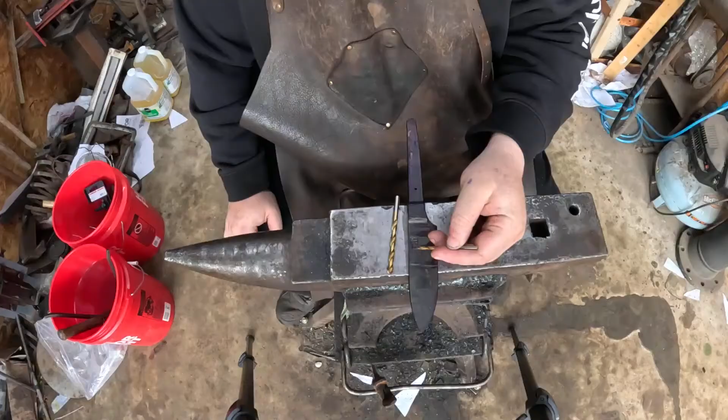Now, we're going to be doing a few things today, but for the most part, we're going to be lining out a full profile of this bad boy. Edge geometry, blade geometry, handle geometry, every geometry known to man, because not only do we have to have the geometry of our blade here and the edge geometry, but we also have to determine the handle geometry, right?

You can do a couple things with these. You can make them thin and tall, like a fixed blade. You could round them off and make them feel more like the hidden tang that they are, or have more of that kitchen knife look. If we contoured and beveled all the corners on here and made it match up cylindrically back towards the pommel, that's very kitchen knife-esque.

I'm kind of leaning towards, you know, we don't have a super tall bolster area here, which is fine. We could go relatively thin up here, but we're gonna find our center line first. We kind of have a center line in here, but we're gonna find a good grind center line.

And how I do that is on an unground blade. Couldn't find the other ones, I'm gonna go look again. Okay, yeah, because it wasn't on your desk, which is weird. On an unground blade...

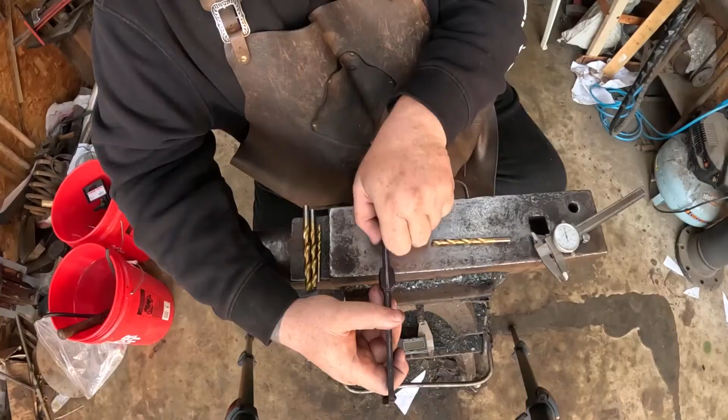You want a distal taper from the thickest point. Your blade should taper from the thickest point, which is our bolster here. You should distally taper towards the tang and distally taper towards the tip.

Now, if this was a full tang - this is just marketing, aesthetic stuff. For a full tang, distally tapered tangs have a much more aesthetically pleasing look to them. You're always distally tapering your blade, but distally tapered tangs look better.

Thick to thin, thick to thin, thick to thin, you know. So when we get over to the grinder, the last thing we're going to work on is the bolster area. First thing we're going to work on, blade. Secondary thing, tang - we're going to get it down.

Do we need 5 inches of tang out here? Absolutely not. We only need about 3.5 inches - we don't even need that much. We're only doing like a 4.5, not even a 4.5 inch handle, because we got to take into account that bolster area is part of the handle.

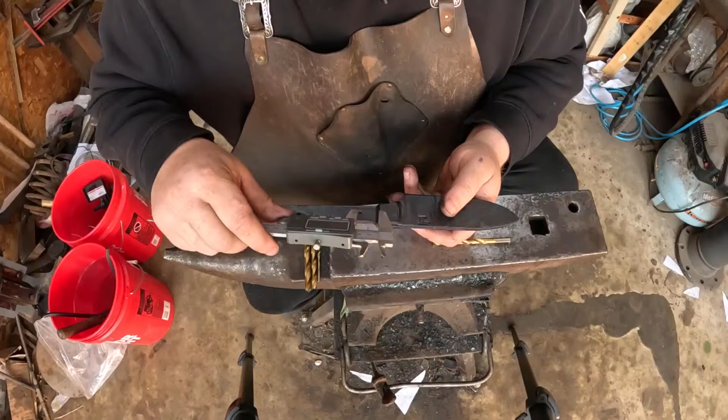We are at 0.8. Now that's where we start to swoop down into our tang and our blade. 0.860, yeah, 0.860 on either side. Now that's of an inch. We're using freedom units here in this shop. So, 0.860 of an inch for our length of our bolster.

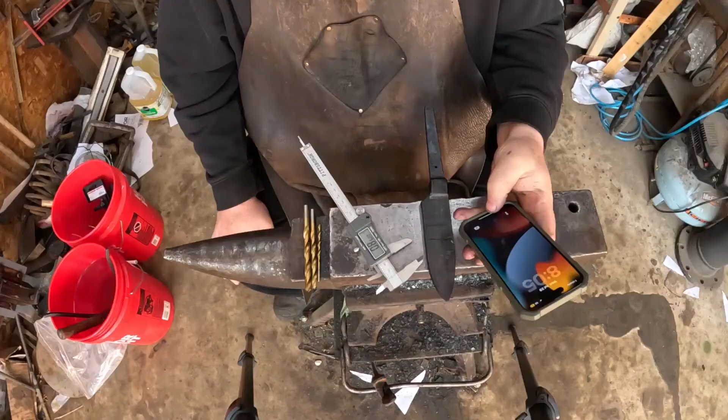Now, if you want to figure that out, 0.75 is 3/4 of an inch. So 0.80 is somewhere along the lines of, let's see here. I think it's, no, okay. Just under 7/8. Just under. 7/8 is 0.875, so it's right, it's a hair over 3/4, more than a hair, and just a hair under 7/8.

So right there, would that be like 11/16? No, 11/16 is right up close to... no, 11/16 is less than. I'm an idiot, 11/16 is less than 3/4. I'm an idiot, that's what happens when you have to voice your math instead of just doing the math and getting it done in your head and then going and grinding it.

Like, I'm doing more here for you guys than I ever do for myself. I will literally not ever use these things, right? And I don't draw center lines. I literally just go in there and grind, and I just freehand it all.

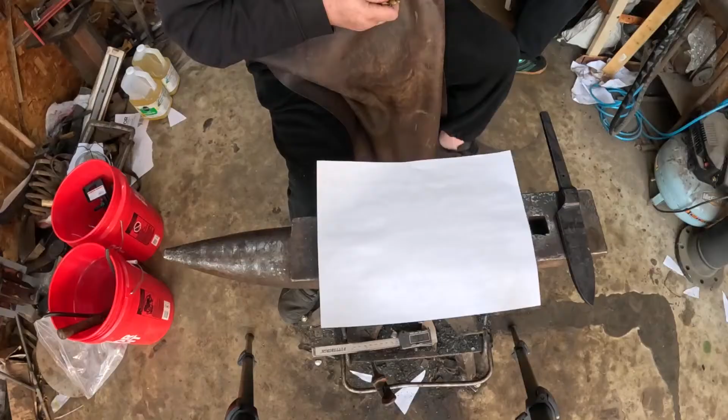Give me a paper and a pen, a pencil. Paper and a pencil, or a paper and something. We're highly organized here at Rust Hammer Forge. Yes, always and forever, just for you guys, it's all for you guys. We're so organized that we don't know where the shit is, our pens and pencils are, and it's all good. Here, we got a pencil. We got a marker. All right, marker, that'll work. For as many pens as I have for work, I can't believe we don't have any out here.

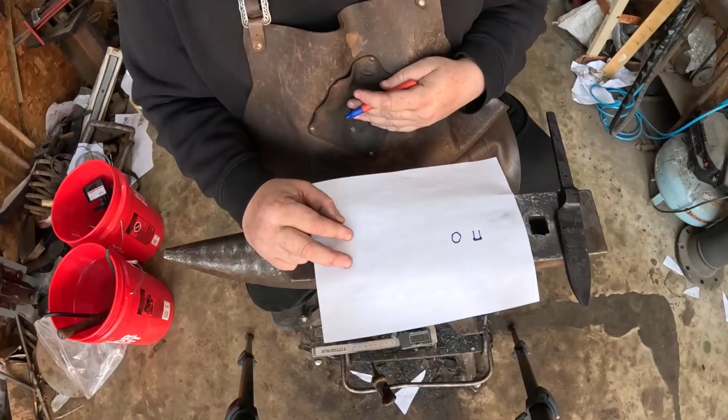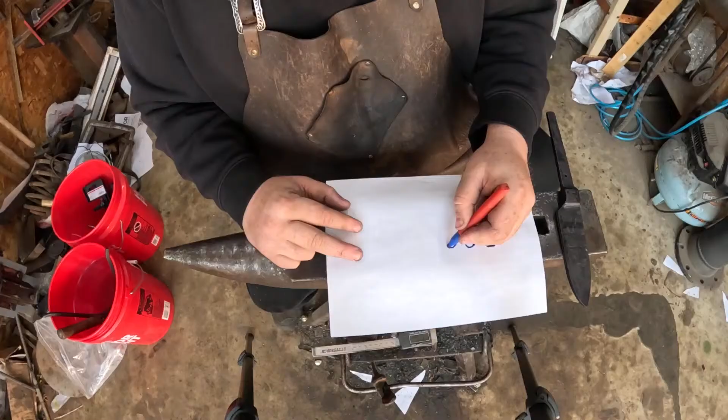Okay, so we can either go, as we're looking down the blade, we can either have it be square, where it's slightly rounded across the top, slightly rounded. We could go round right here, where it's not completely round, it's slightly faceted. We could go completely faceted, like a stop sign in there, and then that carries back into the blade or into the tang.

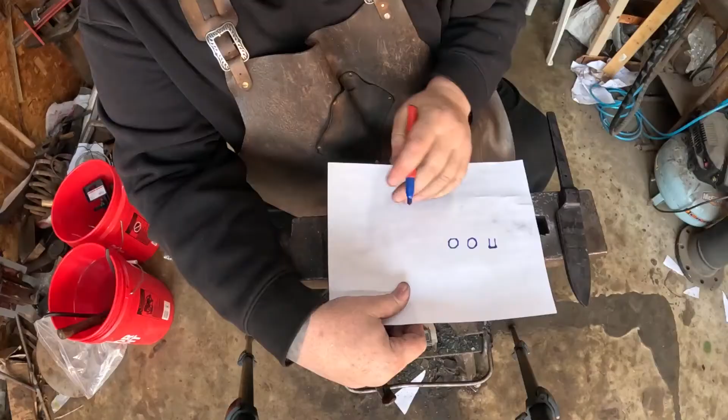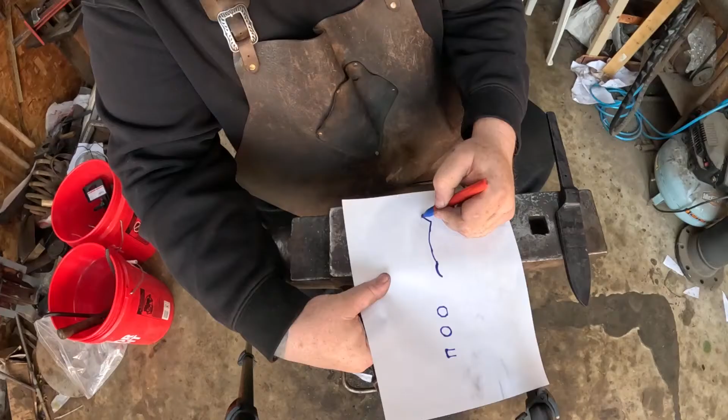I'm kind of leaning towards something simple of a design, to where we come, there's your finger catch, right? Soft transition, handle back here, it kicks back and comes back across, like that, something like that.

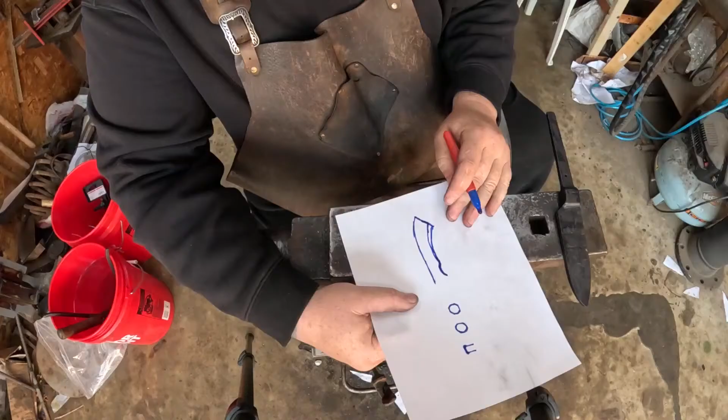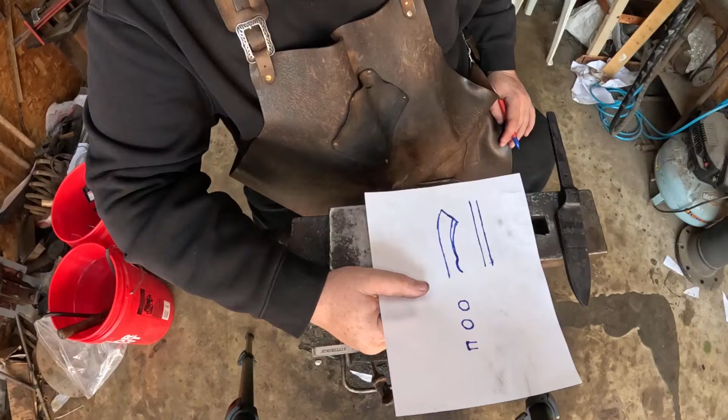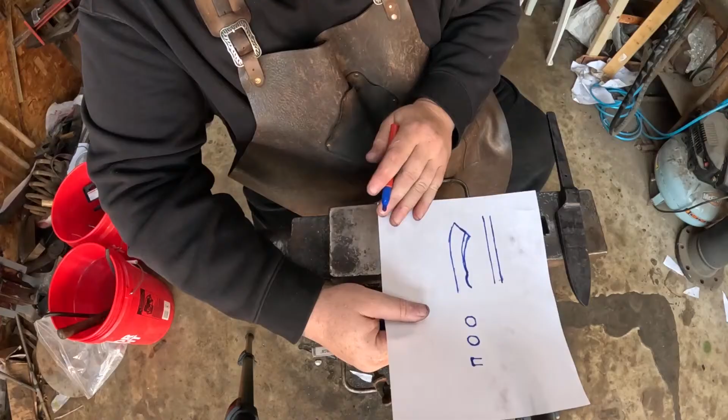Obviously the proportions aren't great because we need a bigger pommel area out here to really hold this in your hand. Now this could either be super, like, come here and it be just the same thickness all the way through, and that'd be good. That wouldn't be too bad, you know, be easy to use, it would still feel good in the hand. It'd feel like basically a large buck knife handle when it was open. But most likely what we're gonna do is we're gonna start here and flare out.

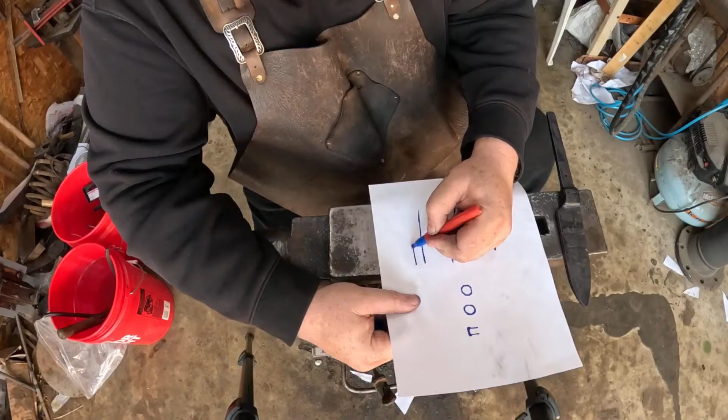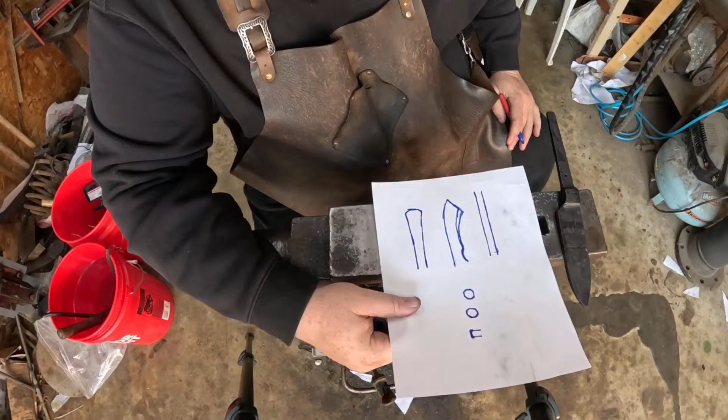We're gonna flare this out at the end, coming around with something that looks like that. So with a big knife like this, I don't necessarily want to make this super round because then it'll want to turn in the hand a little bit.

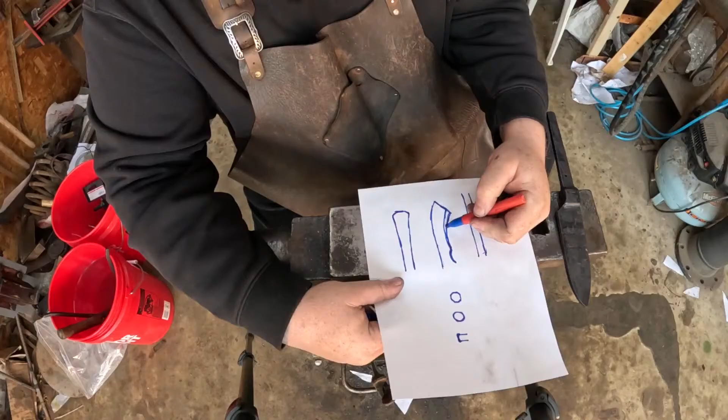So we have to have our flats in here. We can start to kind of round it off back in here, transitioning from this flat area to a slightly rounded area more in the back, in the pommel area. When you start rounding all this out, and then once it starts coming back into this plane right here, we can start running it a little flatter, obviously still keeping the corners chamfered pretty well.

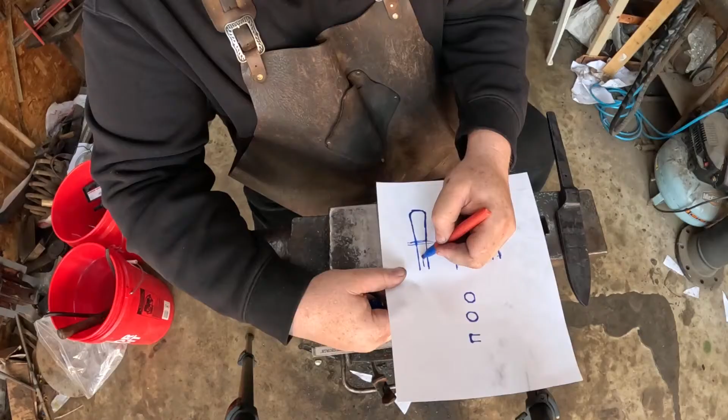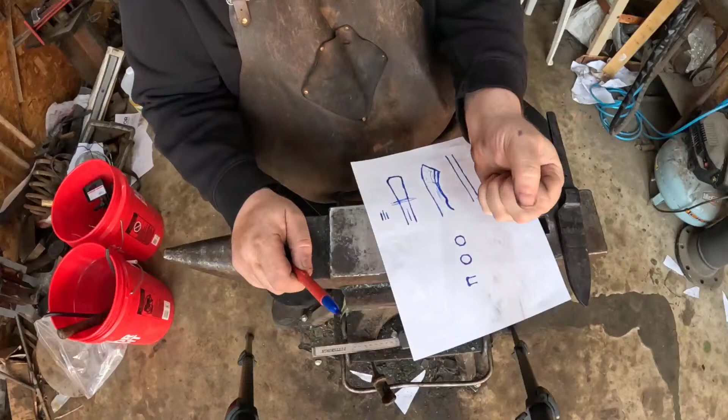And then it also gets a taper. So the top is pretty thick, this is our center line. The bottom right here is gonna be tapered a little bit, because when you close your hand, a tapered bottom piece where your fingers wrap around is way more comfortable. Even no matter how thick this is up here on the spine side, if you taper your handle...

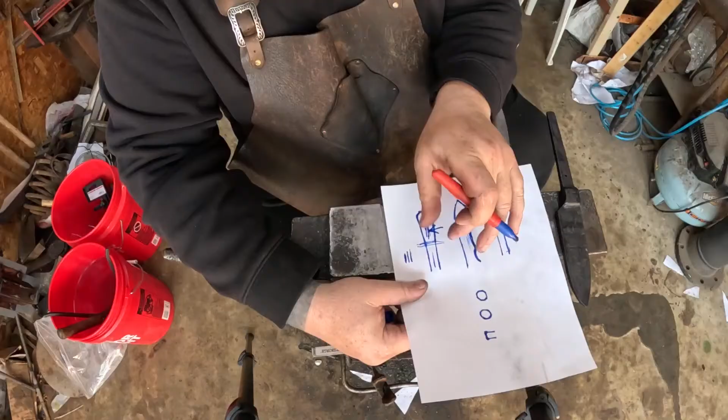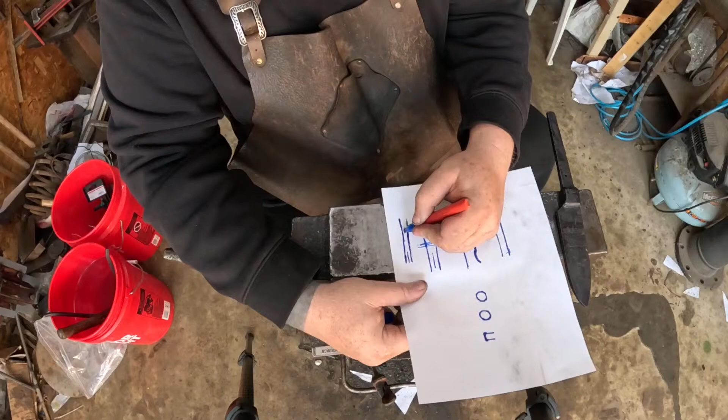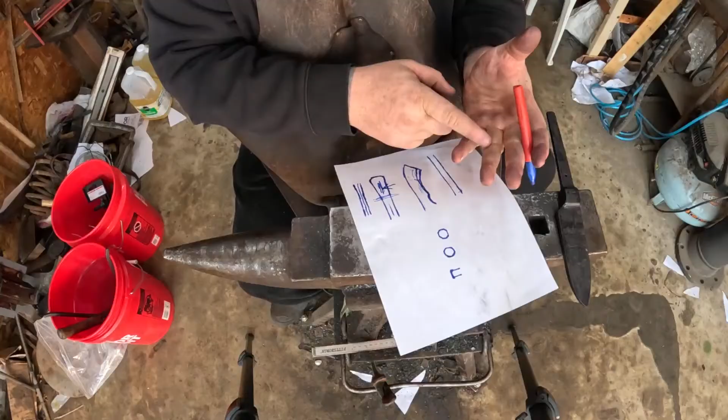...towards the edge side, and you kind of just slightly flare it out to match the flare on the top side, and kind of make it egg shaped, it fits in the hands. It fits right in the creases of your fingers, and you can really index it. That's all about a good knife, is being able to index that edge.

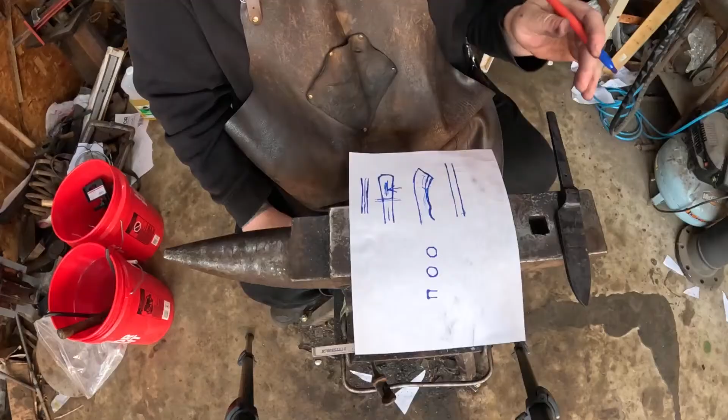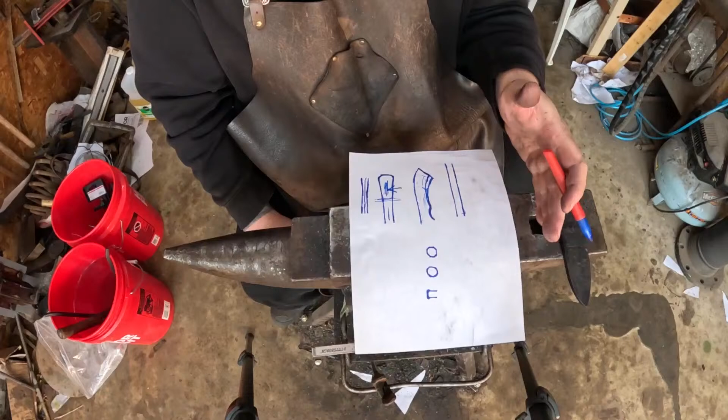So making sure the handle center line lines up with the edge of your blade allows you to index that blade, to know where that edge is at all times.

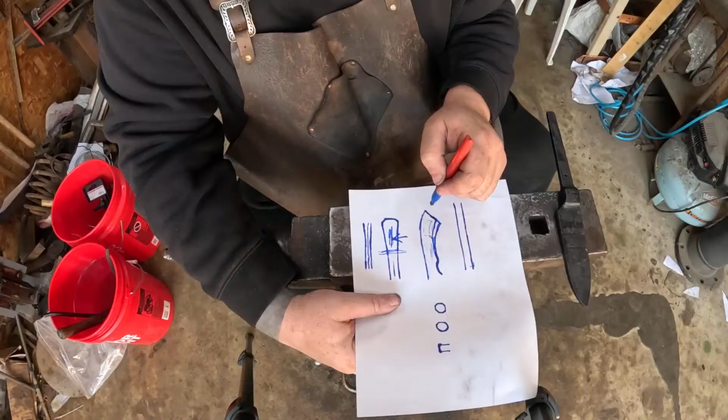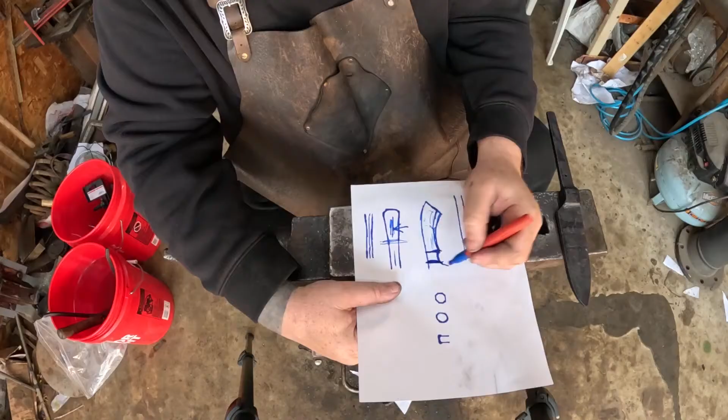So we're getting way ahead of ourselves here, but we have to think about this. Now our bolster is here, so that's where the shoulders are. The grippy part, that's our bolster. Our blade is here.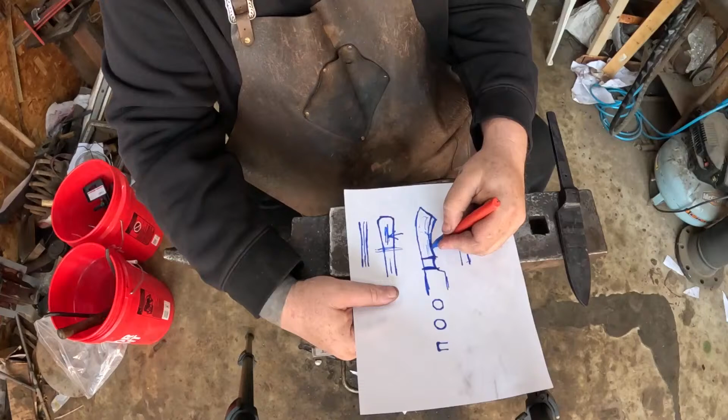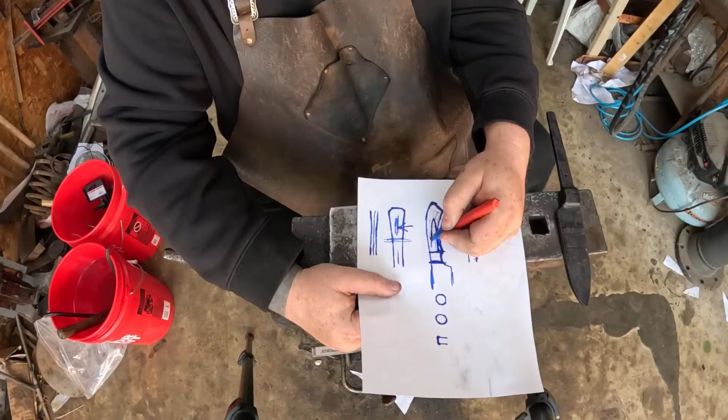Now that I drew that, extended that blade out, this actually looks really good. I'm really liking the way that handle looks. Finger catch, bam, finger catch, bam. Tang is gonna run somewhere around in here. Pin right around in there, give or take.

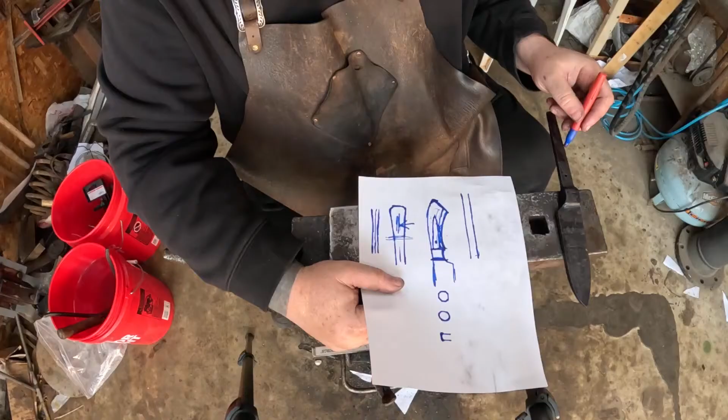So that's what we're looking at right there. The tang has to come down quite a bit. The tang's probably only going to be about half of this - we're probably going to cut half of this tang off. So when we're looking at our knife here, we're probably going to come in here right about in here, cut that off, and we'll do that right away.

And then we find our center line here. Best way that I do it is I eyeball it. Come back in here, we'll eyeball it. So that's the center line of the blade, but we have to go with the tang, so we're going to come back up in here.

And then I'm going to come in here and we're going to mark our angle that we want to cut that down to.

And I don't know if you guys can even see that on camera. Yeah, oh yeah, you guys can. We can see everything, you can see it a lot better. Yeah.

And we may make that tang a little bit longer. Now that I look at it, just a little bit longer. Come back in here.

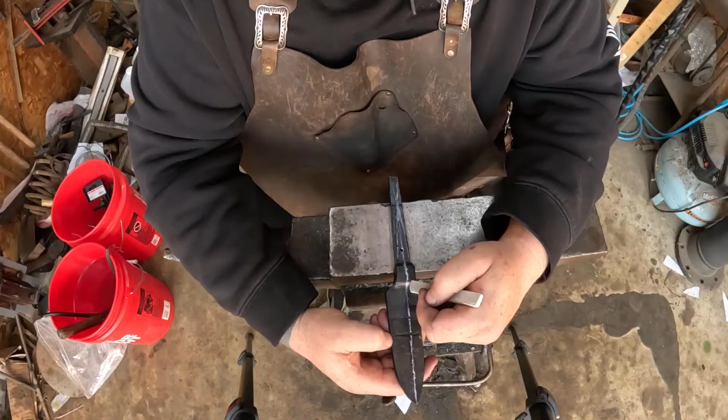All right, now we're almost to the point where we're just going to go start grinding. What we need to do - I don't want to cut this down yet until we get this on the grinder, because this is a really nice handle to grind with. If I cut it down, I'm losing a lot of my ability to control this piece. You'll understand it when we get over here and have it set up on the jig.

We're gonna go start grinding this at probably a 5 degree angle to start out with, and we'll see where that leaves us, and how thick we are. We want this to be right around - let's see here - pretty thick.

So if we go to our handy dandy calculator here, having our spine be at point... let me get all this garbage off of this thing. Clean our calipers. Want our spine to be 0.187, 0.1875 at its thickest.

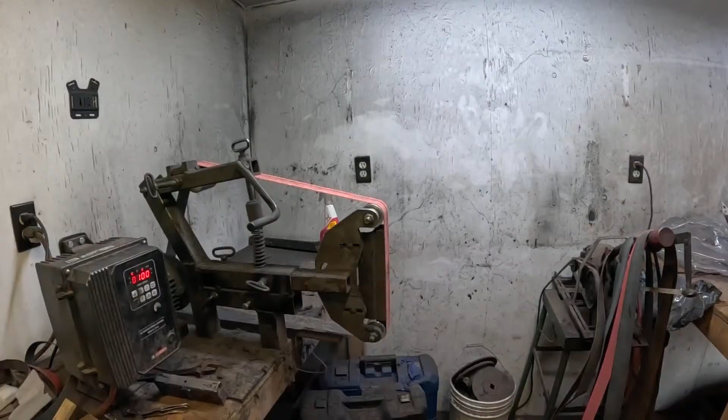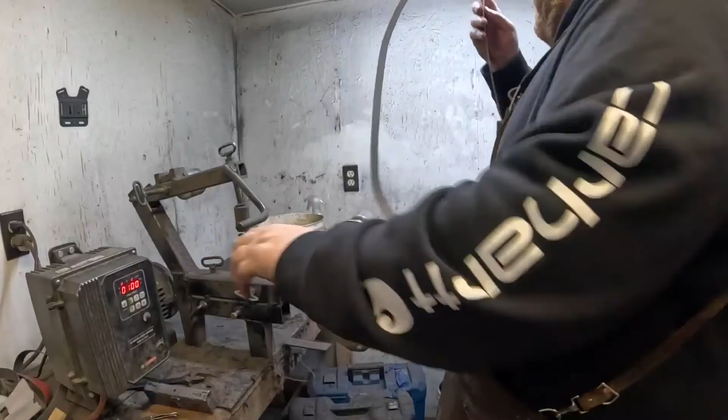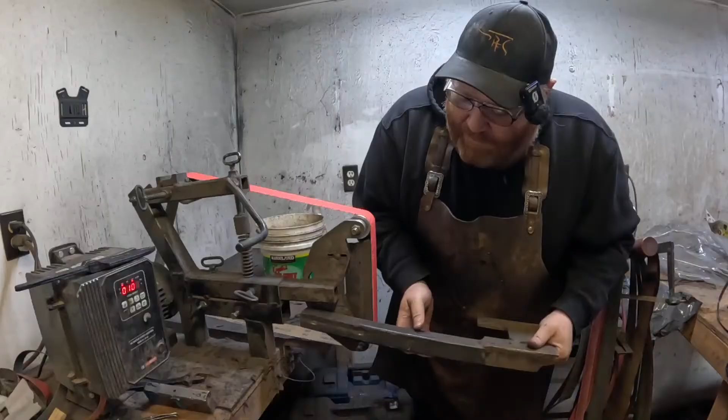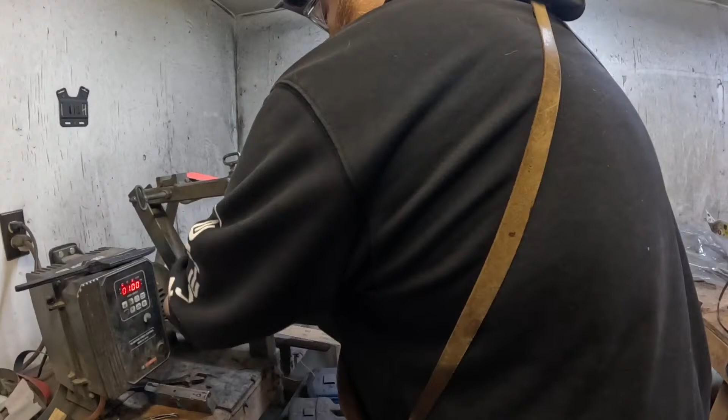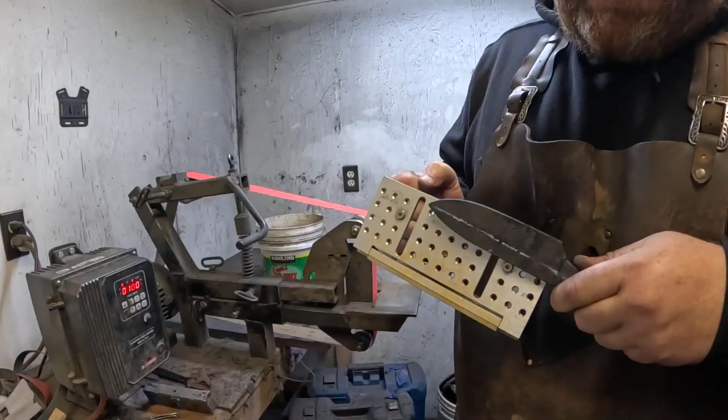Now we're using this nice Chinesium jig, but I can't have—like, I have these bolts to rest on. That's about it, right? So it's still a balancing act. We're gonna put one more of these in here. We're gonna move that one over, and we'll just put another one in there, right there, which we don't necessarily have. Well, we do, but...

And we are set at 5 degrees, 5-degree bevel right now. We just get a bam to there, and we turn around. We're there. Do the best job we can. That's all you can do.

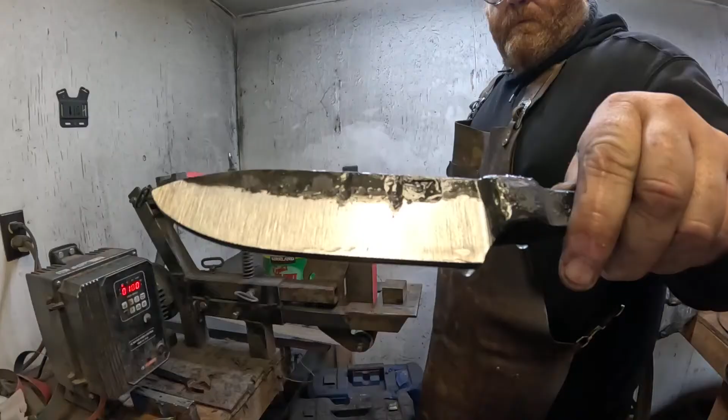See that pattern a little bit when you glint it. Looking pretty good. Woo! Bless you. Woo! All right.

Bit of that center portion here.

We're going to flip our angle here a little bit, and a little more square. A little more blade in there.

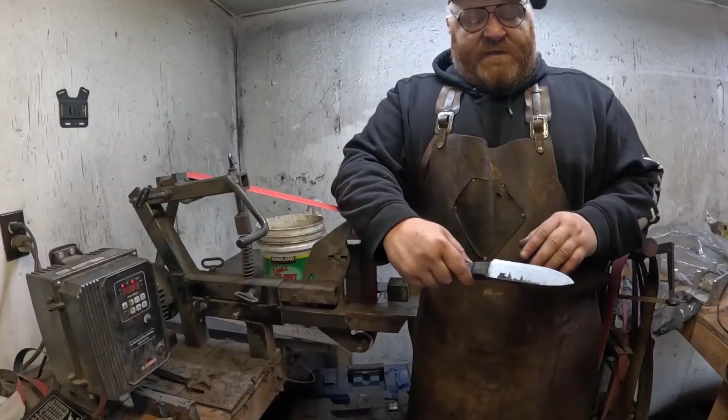Now we're almost there. We'll get this one side down and we'll check it, just for shits and giggles. But we can't do anything with it when it comes to running it through an annealing process and another austenization process, so heating it up for quench and letting it soak. And we can't quench it until both sides of this blade are done. We don't have to do anything with the rest of it—if we know it's soft, it's soft. The tang can be soft, it doesn't really matter, but the blade has to be hard. If it's not where we want it to be, we get the blade equaled out relatively, but it's still thick enough that it's not going to snake on us when we go into our quench. Make sense? Good.

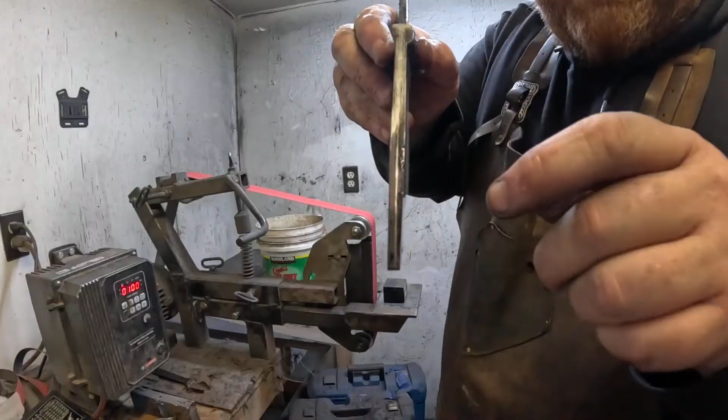You can see we got a nice taper going on that side. Looking really good.

What we need to do real quick is move our tool rest in. We're getting to that point where the blade could fall down in the gap. We don't want that to happen, because then you'd have to take extra time to screw around with making sure everything's straightened back out—it gets in there and just grinds away, and you may end up ruining the blade. So make sure your tool rest is set for the thickness you're currently at.

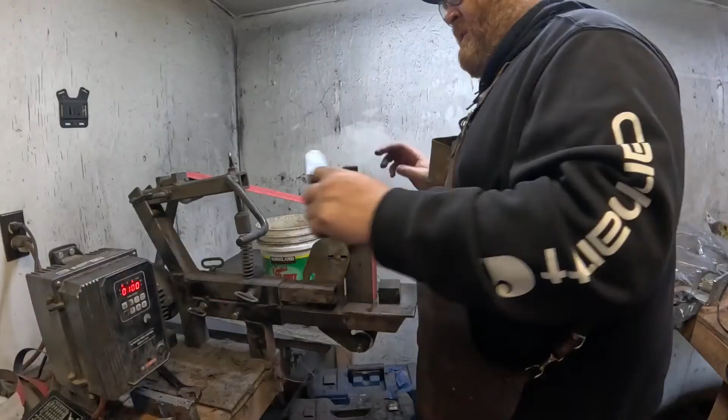We're going to leave that side like that, because we're still going to be going up here like this. So we're going to have a grind where we're coming in and working the transitions off the blade into that bolster, and those will come out and our maker's mark will get cleaned up. So I'm going to flip to the other side. We're going to see about putting you guys on this side of the house.

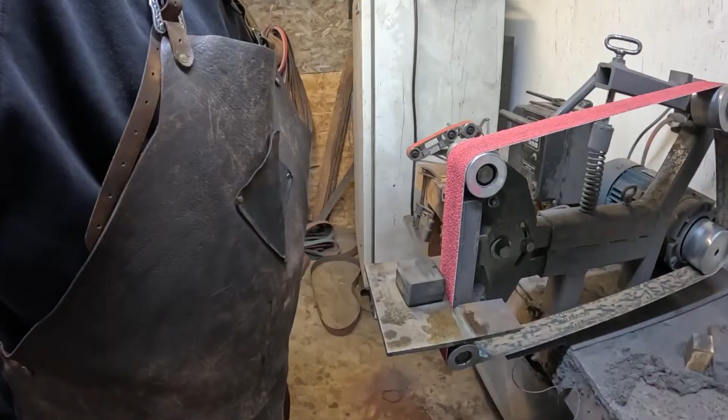Maybe, let's see what we can do. Oh yeah, oh yeah, oh yeah. We're good, we're good. But now it's facing towards me. Let's fix that—you guys get a little closer angle here too. So that's all good, I'm gonna go check that on the monitor.

I'm seeing it right here. It's looking pretty, I don't know yet, it hasn't gotten that far. Let's see what we got here. That's pretty good. Oh yeah, oh yeah, that's good. That's a good angle for you guys. Not bad, not bad, not bad at all.

Alright, so there we go. Now we're gonna go back to the other side. Flip our block over there to mark our bevel, just kind of want to mark that bevel out up next to the edge. That'll get us going. Alright, flip her over.

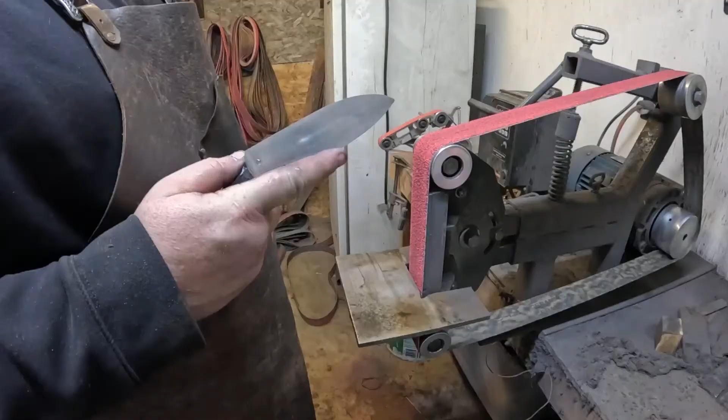Let's get this cleaned up. We're going to go remark our lines real quick. Now we don't have to go anywhere, we can do all of that right here. Just come in here, mark our lines. We'll go get some more of that layout fluid.

It smells like gas outside. I know, that's what I was thinking. Then I was hearing this weird noise and couldn't figure out what it was - the people that bought the property across the creek are cleaning out their duct system. They have the same people that came and cleaned out the school's ducts over there cleaning out their ducting and heating system. Why would that make it smell like gas? I don't know, that's why I'm trying to figure out why it smells like gas. I thought maybe something happened, but it's...

There's all the way in there too. All right, we're gonna get our handy dandy gauges here, the drill bits. And we're gonna mark this out again. Curious.

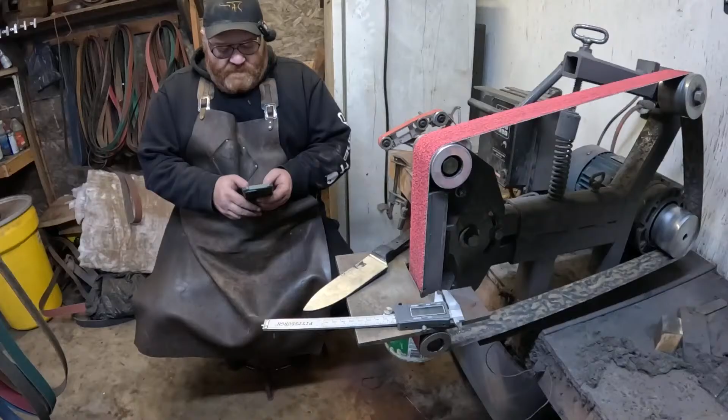I can't picture 13/64 for some reason, but what I can do is do this. I know it's very close. How close is it? It's very close - 13/64 is like 0.203, 3/16 is 0.187. So it's very close, it's potatoes. Okay, so we are sitting at a measured

of 1/4 inch up here. Right there is 13/64, right there at that.

You know, that might not be a bad idea. It's a little heavy though, but if you can make it balanced... it makes it really heavy. Well, it'll be balanced. Right now it's always a little blade heavy - when we get to everything, the bolster's really heavy in here. We need to take more off. Absolutely take more off.

So that's what we're going to do - we're just going to keep grinding on this far side for right now. This isn't the finished grind, these are just initial grinds, so not too worried about it.

I like that this projector does it, except I don't know what 13/64 is in decimal points. If it was in decimal points I'd be like, oh that's close. But since it's 13/64, where the hell does that line up at? What the hell's going on here? I don't know, I'm retarded.

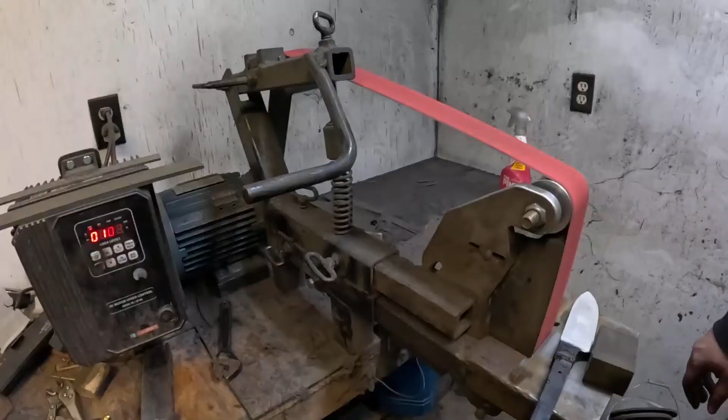We have this side all clean now. What we're going to do is move you guys again, take you for a ride, and set you back up over here. I'm going to try to get you a little closer like you were over there, because that was a really good angle. I didn't hate that - let's put you right around in here. Not a bad angle right there.

I want to get these marks out on this other side. Yes, we will do a pattern check today. Yes, we will.

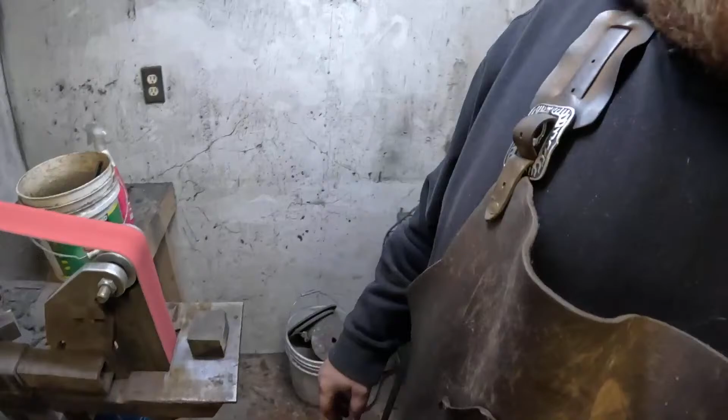Alright, I'm happy with that right there. What we need to do though, we're going to take you for another ride, so we're back on the other side - we're getting adventures today. Don't get sick, hope you guys like roller coasters.

Press on the bottom of this pretty hard. Push back through.